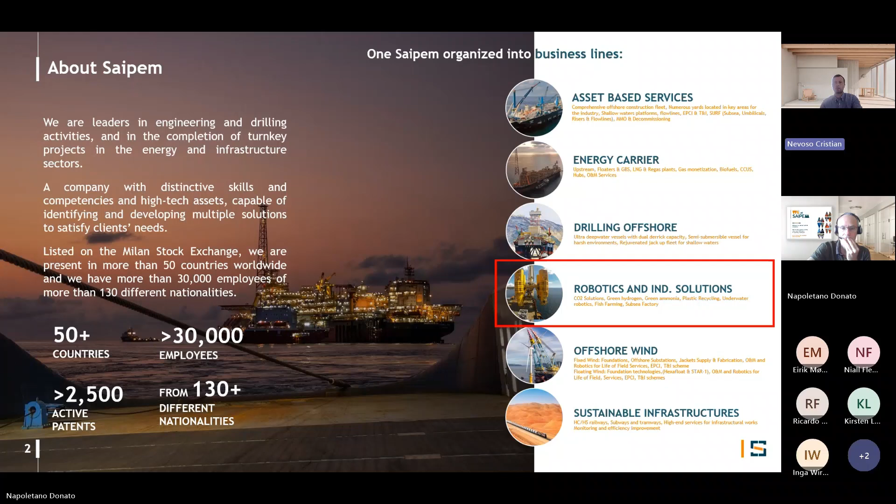Going ahead, let's start with the Hydrone platform overview. Back in 2016, we started working on a new generation of subsea drones for changing our way to approach subsea activities, especially for inspection and intervention campaigns. So we started developing a family of vehicles called Hydrone.

The main characteristic is the fact of not having the need to have a support vessel always on top of the vehicle, but they can remain subsea resident for a few months, being controlled from a remote control station. This was the main novelty that we tried to introduce in these new vehicles, which differs from standard ROV or AUV for this main reason.

Then, meanwhile, we developed the platform. We also introduced a lot of new technologies, artificial intelligence capabilities, a new set of sensors for having more quality data, reliable information, and tried to expand the way we used to perform IMR activities.

All the vehicles are designed for 3,000 meter water depth. They are all full electric vehicles. There is a set of components that are shared between the vehicles - it's a platform, and even functionalities and algorithms that have been developed so far.

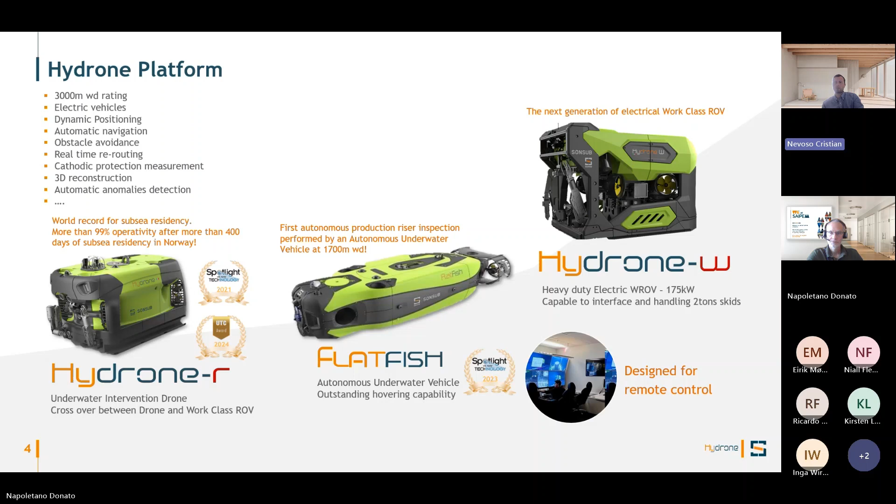There are many things that have been developed on this vehicle. The last one we just completed is the Hydrone W. It's more a Work Class ROV type of vehicle, still a drone that can remain underwater for months like the other vehicles in the family. It was completed a few months ago, and we are just completing the commissioning this month. We will discuss this vehicle more later.

So why did we start working on this new family of subsea drones? Mainly it was for reducing costs, reducing the risk of operation, and reducing CO2 emissions, while improving the way of operating.

The main target of this vehicle was to reduce as much as possible the offshore support while operating. As soon as we deploy the vehicle in a subsea garage, a subsea resident configuration—in the case of Njord it was a subsea docking station—you can, through the remote control station, control it, supervise it, or pilot it. This was one of the main key changes we tried to introduce with this new technology, and the results were very good so far. We are aiming to fully change the way of performing IMR campaigns soon.

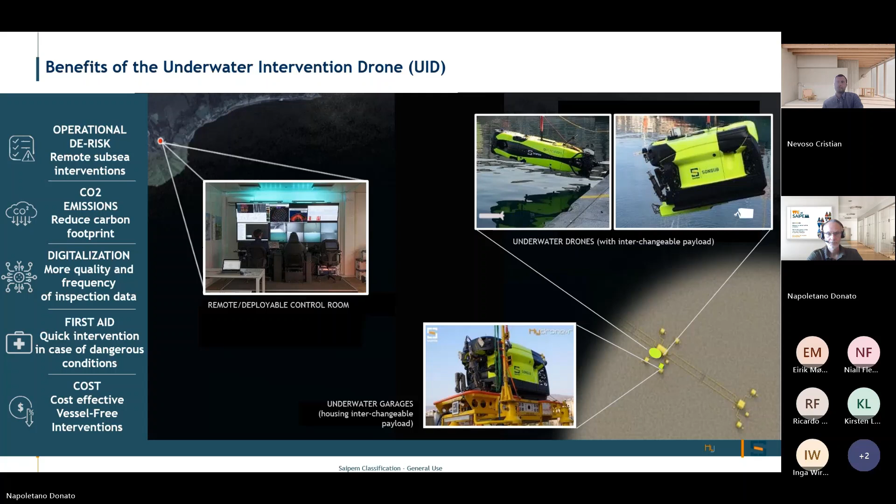Let's go to a more detailed description of the Hydrone-R. As we said, it's a hybrid AUV ROV vehicle, so it has light intervention capability through a manipulator and a grabber. It can work tethered. It has a TMS integrated in the body of the vehicle, which allows managing the tether length while navigating, with the tether connected to the subsea docking station.

The vehicle is battery fitted, so it can travel for a few kilometers, typically for a shift of 12 to 14 hours in terms of autonomy. It can remain subsea resident for a few months. As we said, it was already tested in this configuration, and we will see what we achieved already at Njord.

Currently, the Hydrone-R is remotely controlled from a remote control station. It can even be controlled from a vessel if you decide to use it as a more conventional vehicle. There's this flexibility of using it as launch and recovery from a vessel or in a resident configuration.

It's a flexible platform in the sense that we have a set of payload sensors permanently embedded on board, like stereo cameras for 3D reconstruction, both front and down camera. We have a set of sonars that help the pilot or the vehicle navigate and use the collision avoidance functionality. We also have an imaging sonar and a laser for more detailed structure inspection.

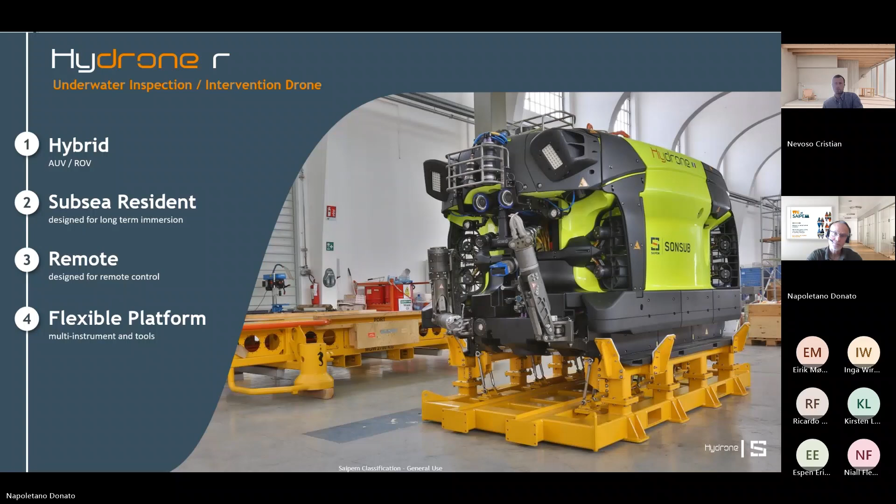Hydrone-W is the second vehicle that is supposed to be deployed in Njord. Currently, we haven't touched on the contractual aspect of the Njord project.

Donato will probably touch on it more in detail later, but we signed a long-term service contract with Equinor in 2019 for 10 years, foreseeing deployment of the Hydrone-R and Hydrone-W in the same field. We started with the Hydrone-R, which was already ready, and the Hydrone-W was developed meanwhile and is now ready for deployment in Njord.

There are some discussions ongoing with the client for understanding the best moment and the best way to use both vehicles there in Njord.

The Hydrone-W is a full electric Work Class ROV style subsea drone that is power fed from an external power source instead of having batteries, since in this case the power required is much higher for the work duties to be performed properly.

It's full electric even in terms of manipulation, so there is no hydraulics on board, apart from specific auxiliary tooling we might want to connect, but it's 100% fully electric.

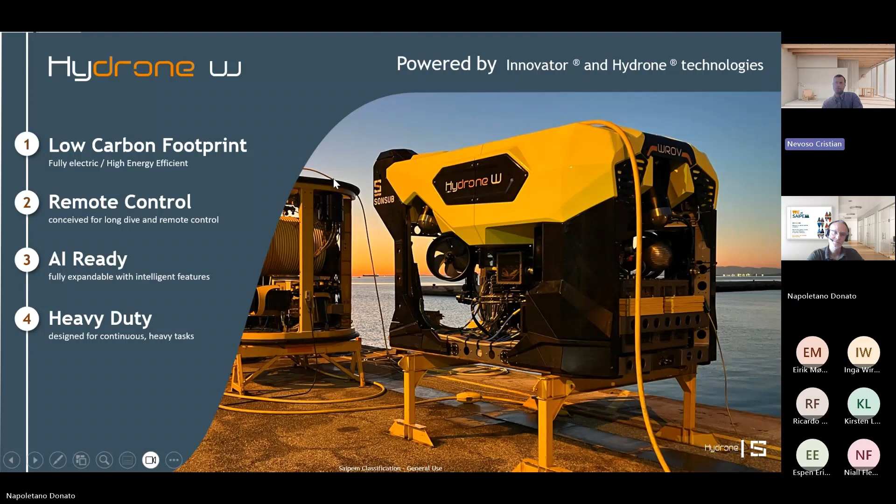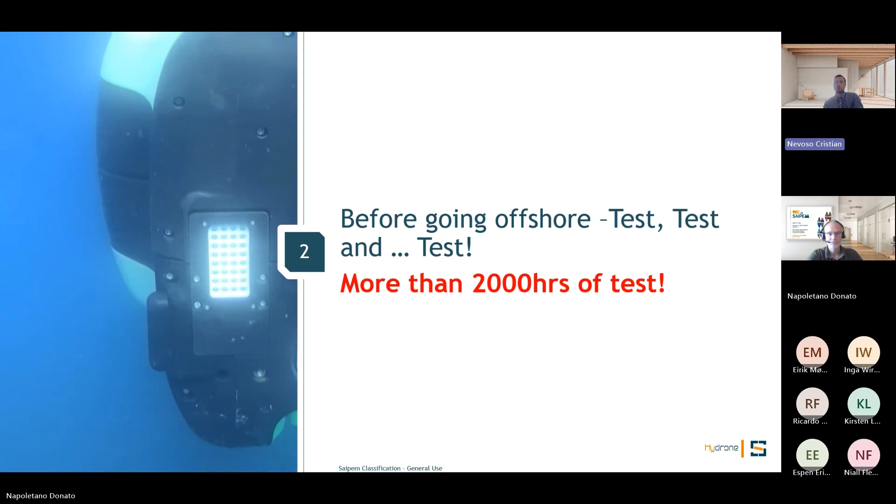Since we discussed this new technology and all the novelty we tried to introduce, one of the main steps was testing and qualification activity. As soon as we introduce new technology in the oil and gas or energy industry, we want something reliable and very well qualified. So we went through a very long qualification process that lasted many months for all the vehicles and was completed in our facility in Trieste.

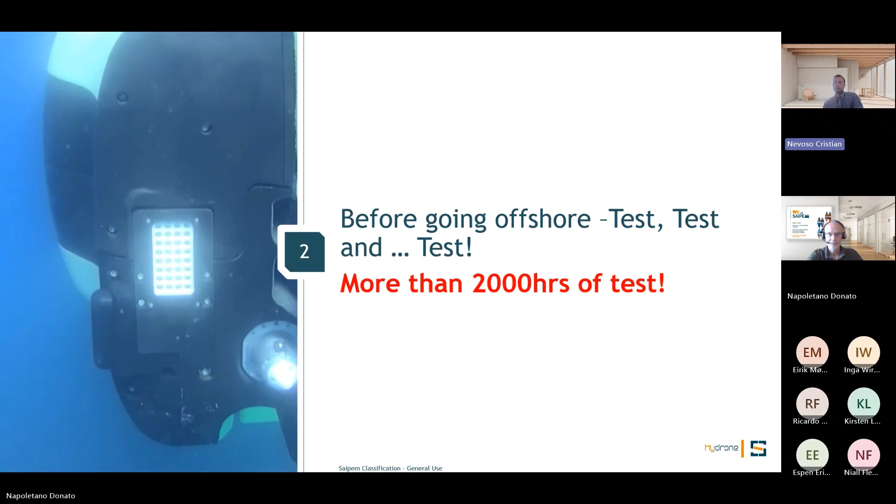This is just a very brief overview of the Trieste playground. Go next, please.

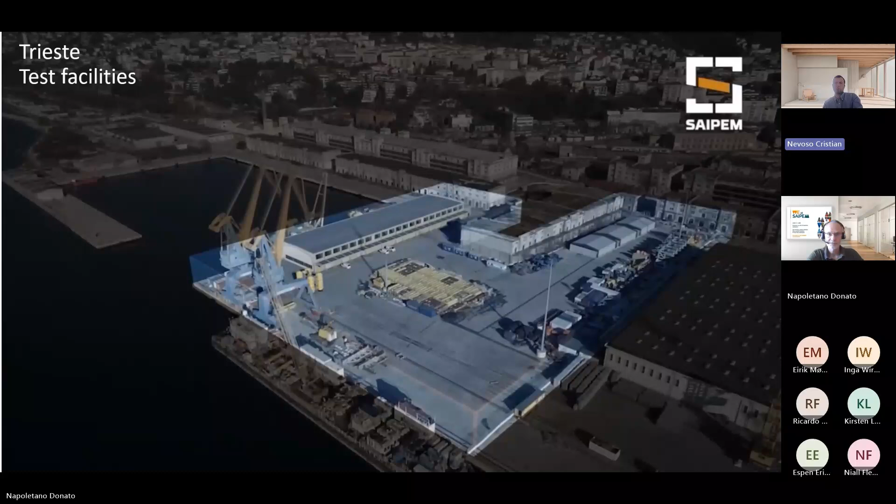It's actually close to Venice, about 1.5 hours by car. Saipem has a yard there for general logistics and operation. In this yard we have a space with access to a jetty and to the water.

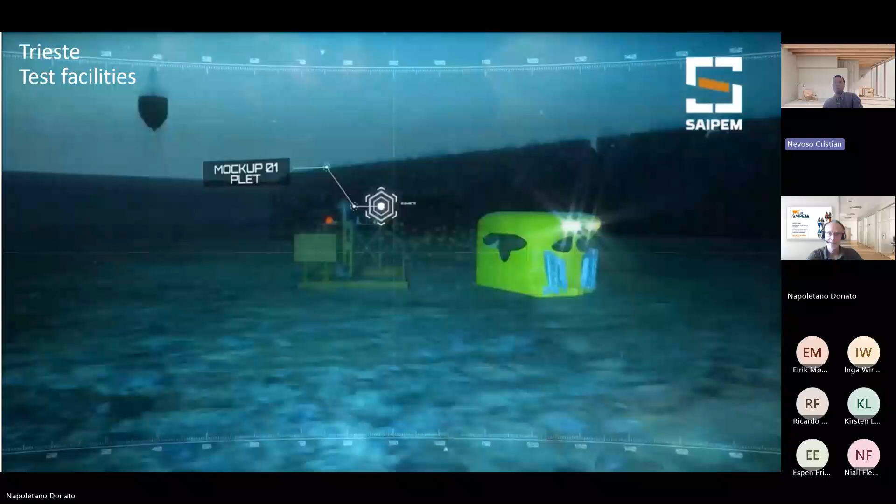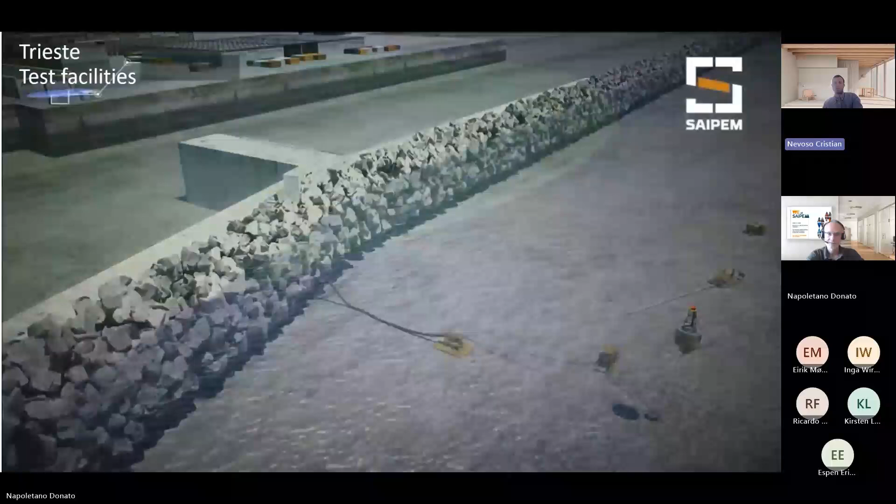This is the area where we used to test subsea solutions in Saipem, where we developed what we call the playground, in which we deployed a few subsea structures to replicate a small subsea field. There are two main areas in the facility.

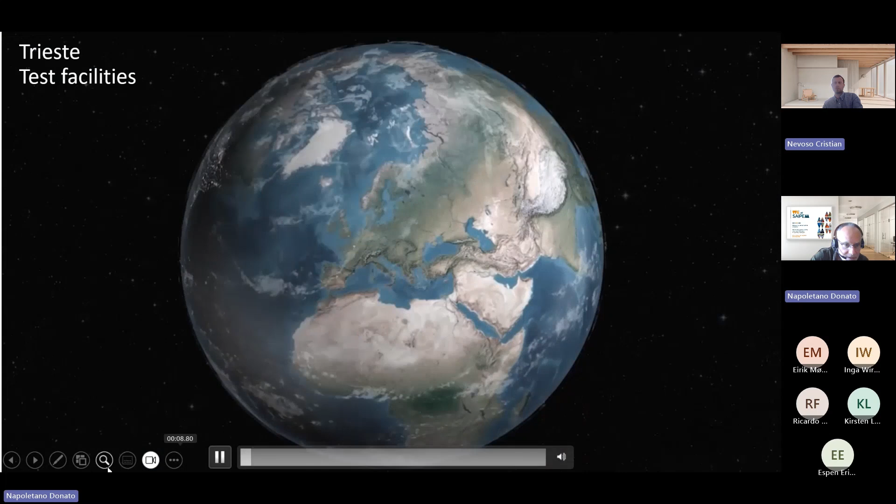As I said, there are two main areas: one more close to the jetty, and the other one in the open sea, I would say.

It's not very far from the coast, about 1 kilometer from the jetty, where we installed a few pipelines, few structures, few cases for trying to train the vehicle, to inspect things properly, and to qualify all the functionality.

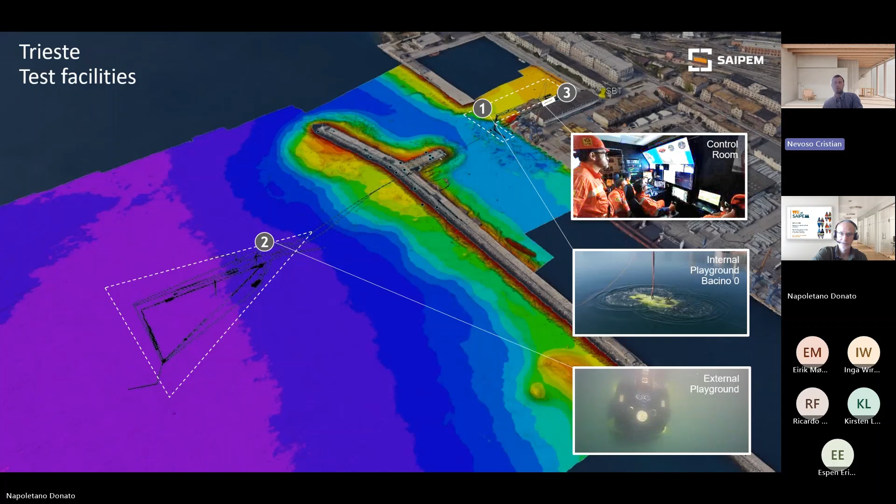If we go next, we can see the detail of what we already installed. Okay, was that the previous one? Oh no, there's no slide for the detail. Okay, probably we didn't include that.

I don't know if there are any questions so far with the general overview of the Hydrone platform and qualification and testing facilities. Otherwise we can just move ahead with the Njord project.

This is Eirik again. You talked about implementing artificial intelligence into this. Is that something you could talk a bit more about?

Yes, sure. Mainly for Hydrone-R and Flatfish, we developed specific functionalities to help them properly navigate, recognize features, recognize anomalies while performing autonomous inspection, or even reduce the risk of collision while navigating in ROV mode.

A layer of artificial intelligence has been developed internally in Saipem. Through the embedded sensors, it is able to improve the way the vehicle can navigate autonomously.

Just looking at the obstacle avoidance feature for example: while the vehicle is navigating in ROV mode and there is an obstacle in front of it, it can stop, understand if there is space on one side or another, replan the path to overcome the obstacle, then restore the original path and continue with the pipeline inspection mission.

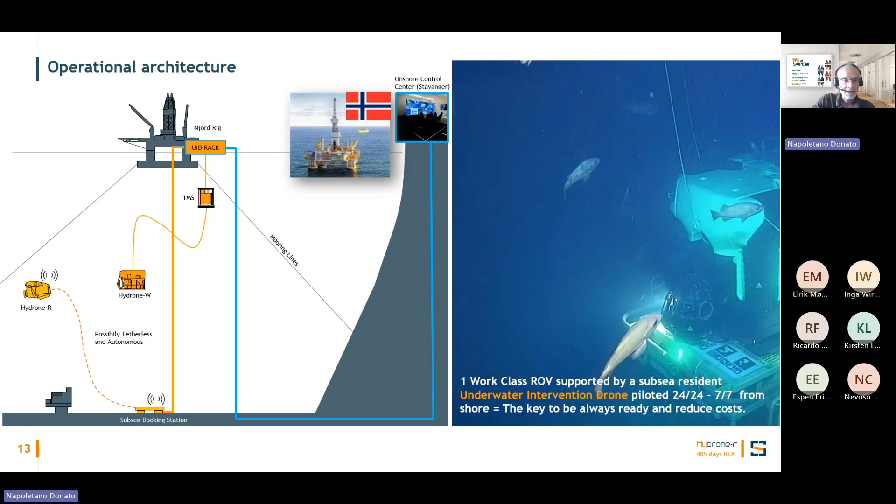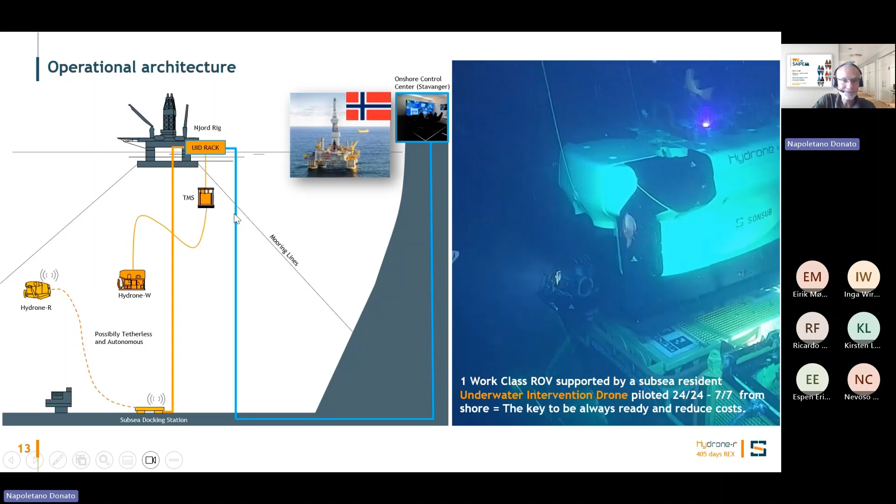This image also shows there is a link from the platform to the onshore control room. We have office and control room in Forus, Stavanger. You're welcome to visit if you pass by. The video on the right side shows one of the dockings of the system onto the Equinor-provided subsea charging station. The docking station is basically to park the vehicle, recharge the batteries, and download the data.

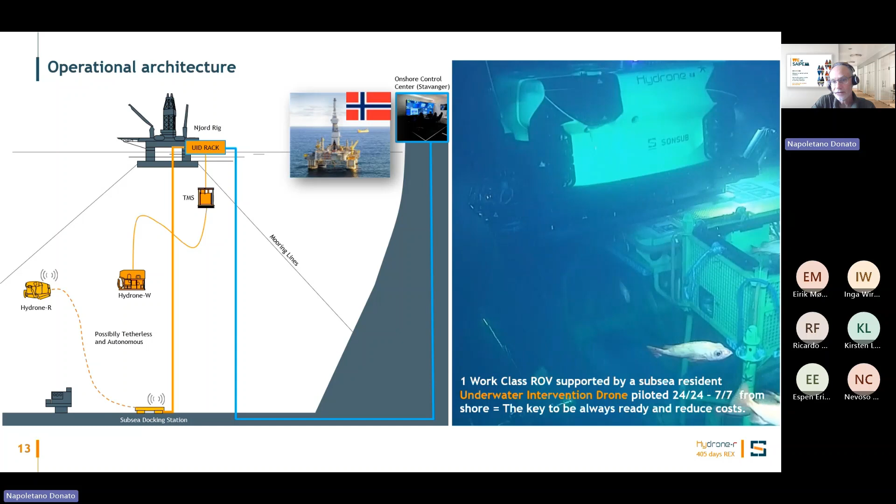Plenty of fishes. That can also be a problem. We have learned operating on Njord that they can have an impact on the optical and acoustic communication, but it's something we are learning to manage.

Okay, then we have inserted this video.

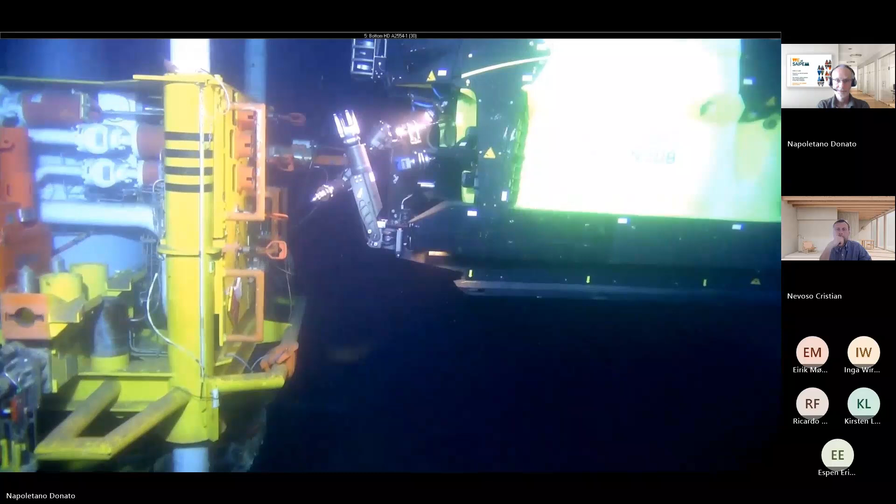This is a short video of a streaming that was organized last year while the vehicle was performing subsea intervention and subsea activities. I think it was good to see the vehicle working in real time while we were performing the activities, and it gave a flavor of what we can achieve there. Exactly one year ago at the UTC in Bergen, there was a live stream.

Next, just some highlights on the project schedule so far. As already anticipated by Christian, the contract was awarded in 2019. Then the rig was delayed by a couple of years because of the pandemic. In 2022, we did the company acceptance test of the Hydrone-R, but at the time it was still in Trieste, not mobilized. We started the operations in parallel with the rig production activities with the work ROV that is presently installed on the platform.

In 2023, we performed the first mobilization and dive of the Hydrone-R, and we completed and started to operate the onshore control room in Forus. 2024 was the second dive. In between the dives, since the system is resident, it cannot be maintained subsea, so it has to come to surface and be shipped onshore for maintenance. So 2024 was dive number 2. In 2025 we are about to start dive number 3 for Hydrone-R, should be tomorrow or the day after, having completed the second planned maintenance.

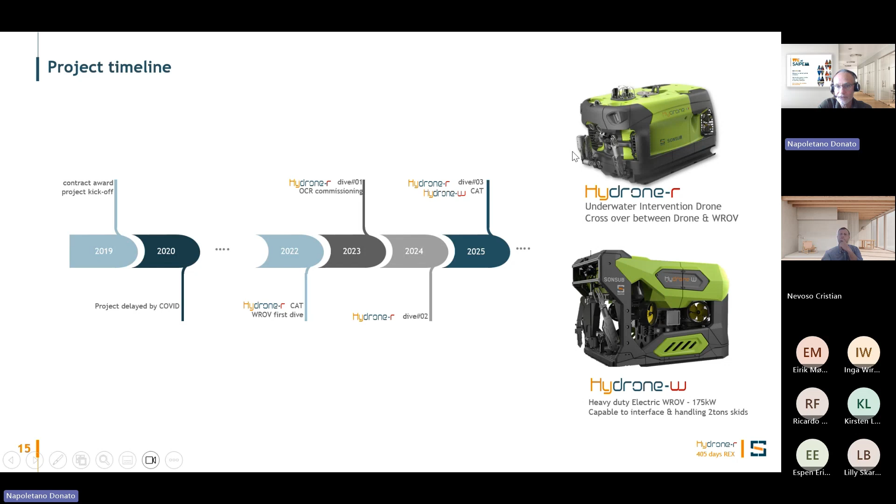This is just a slide to present some highlights on the first dive. It lasted 165 days continuously, which was quite impressive. To me, the most important thing to highlight is that this could be achieved mostly because we performed extensive testing in Italy, in our playground, prior to going offshore. But still, even after so many hours of testing, it was the first time that the vehicle was deployed to depth in the environment where it is operating.

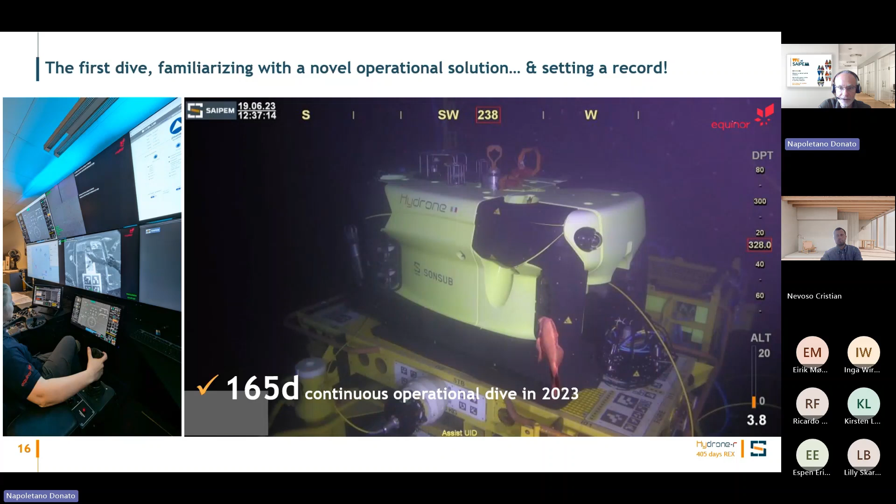So we were very, very pleased about reaching this big number of days. And it was even more on the second dive that was completed last year. We achieved 240 days, almost 8 months continuous operation, with 0 days wasted waiting on weather, of course, because it's a resident system.

We did a period of 11 days in 2024 in which the work ROV was waiting on weather, so it was not possible to deploy it, but the Hydrone-R was able to complete, to carry on with the Njord inspections program, because of course it was already ready in subsea.

We did 30 days more with more or less without ROV support. There was a period in which the platform underwent a revision stop, so there was no ROV personnel on board the platform. There was no ROV deployed, and we had only Hydrone-R supporting the rig operations, piloted from remote, for a period that lasted about a month.

More than 5,700 hours continuous dive, and more than 10,000 hours of offshore time saved with remote operations.

A few tangible achievements: the successful resident deployment for the world's first contract of such type, risk and cost reduction mostly driven by the subsea residency and remote control. We are part of a wider project of electrification of the Njord Field, having delivered electrical vehicles fully remotely operated.

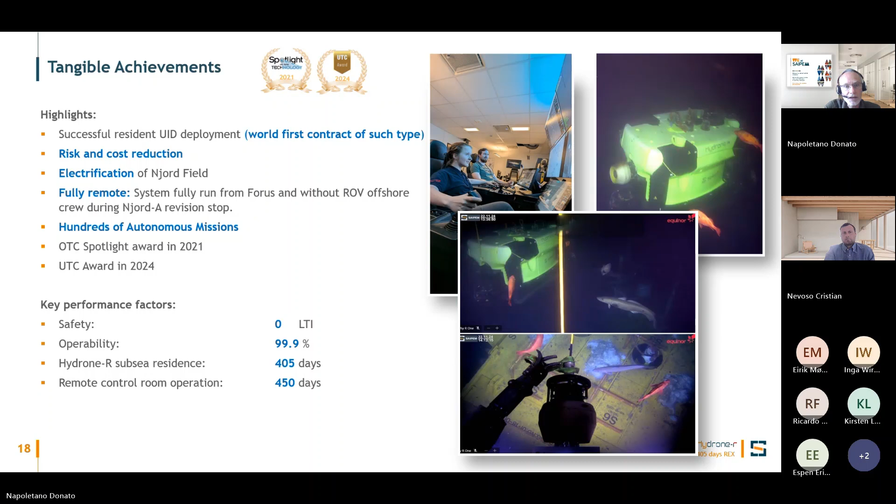To conclude, just a few more details on what we can conclude has been the experience so far. Overall, it's been very, very positive, mainly because of safety results and the reliability of the system. It's also been a good path so far with Equinor, the client, because they've always been cooperating. It's been a real teamwork approach that is always pleasant to do.

We have demonstrated the savings driven by the residency and remote control, exceeding expectations on subsea residency. Myself, I wouldn't have believed that the system would have stayed subsea for 8 months without any trouble. So even the people working in the team, like myself, were really happy about that.

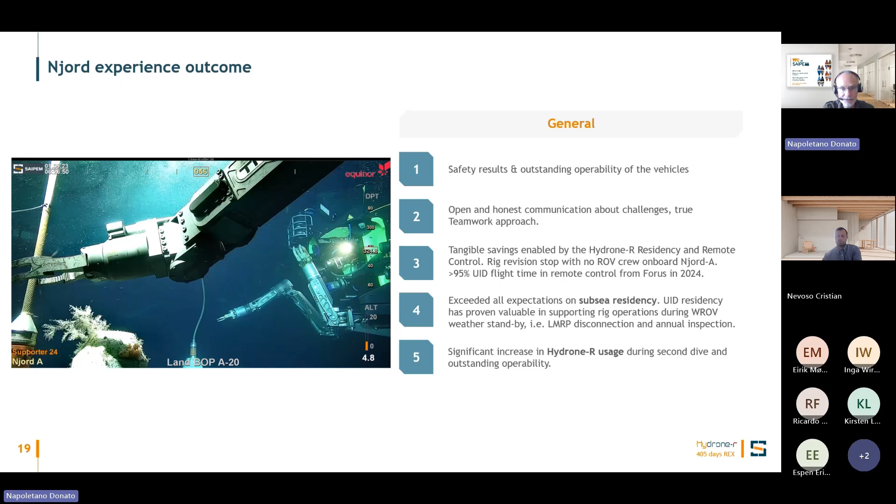Over the second dive, we have pushed the system to the limits. At the beginning, the first dive was again in line with the step-by-step approach, so we didn't push the system too much; it spent some time not directly introduced to the operations. But during the second dive, we basically flew the system every day, and it took part in real operations more than during the previous dive. So it's gaining even more confidence as we go, from the people and from the client. We have also learned a lot in the field, because of course we are in different environments from the testing facilities.

For example, we have implemented acoustic communication environmental adaptations that was not possible to do in Trieste because we had shallow water. So we have learned how to communicate with the vehicle on the field. We have performed like 400 hours of AUV missions, still connected with the tether, but fully in autonomous mode.

We did also demonstrate on a few occasions full tetherless AUV inspections. We did some Christmas tree inspection in autonomous mode and a survey grid.

We did learn a lot on the recovery of the vehicle when it was sent to the maintenance. As you can see from the picture, in some components like the manipulator, the amount of corrosion and marine growth has been excessive. But this has been a good learning, because the system generally has been designed by us to be subsea resident. But there are third-party commercial items like the manipulators that are not sold to be resident. So there has been a lot of work, particularly during the last maintenance, to improve the third-party equipment subsea residency performance. We expect this will be an improvement over the future dives.

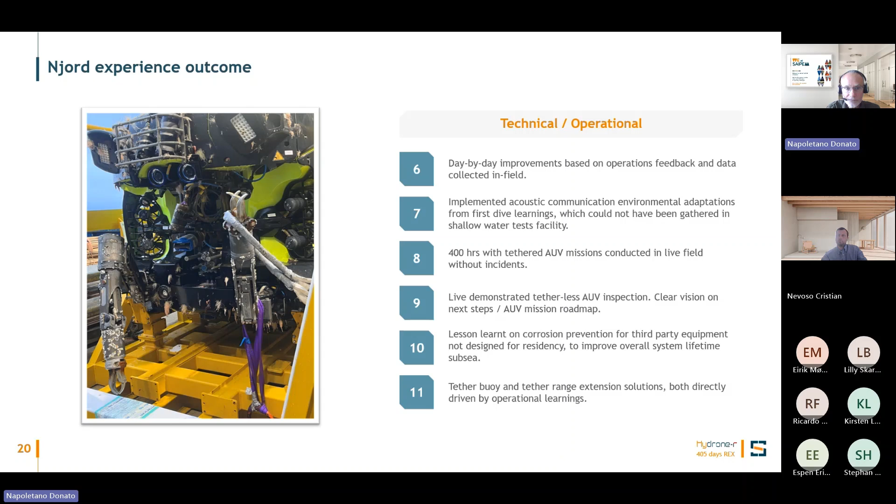We have also learned by doing what we can do with the system. For example, I can show better in the next slide, something that we thought during the operation was to connect basically the Hydrone-R to the Work ROV, rather than connect the tether of the Hydrone-R to the SDS, that is the subsea docking station. This way, basically, we almost doubled up the length of tethered coverage.

So this way, we can further reduce the need of a vessel to perform some of these inspections, because we can actually go with the system in tandem configuration up to 500 meters from the platform, and this should bring significant savings for Equinor. This is something that has been tested already, not to 500 meters, but during this upcoming third dive it will hopefully be proven. This is something that we are working on.

Okay, so as I said, we are about to start the third dive. Focus will be very much on keep learning and keep developing autonomous missions. We will start once again with field adaptation and familiarization, because, for example, the issue of the fishes interacting with the communication of the vehicle still needs to be fine-tuned.

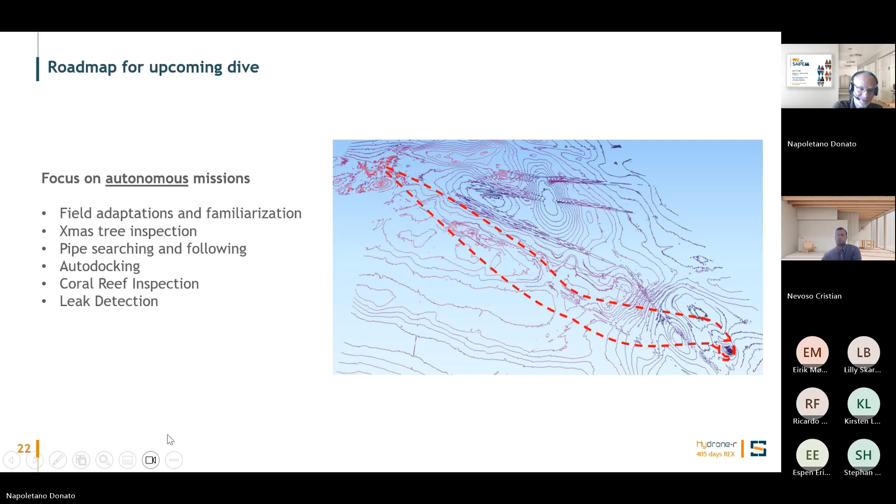I have one question about the distance. How far can it go away from the docking station? Is it like time or distance? If you're doing the pipeline inspection, I guess that's a limitation of how far. From Njord A to Njord Bravo, it's less than 2 kilometers, but I think the acoustic communication, in theory, can work up to 3 kilometers in those conditions.

We need, of course, to demonstrate that we can go that far. Cristian, correct me if I'm wrong, but I think we can even go further than 3 kilometers, though then we will not have any communication, right? Yes, indeed, acoustic communication would be the limit.

I think the question is more related to how much autonomy the vehicle can have without needing to recharge the batteries. The vehicle can travel about 10 to 12 kilometers maximum. Obviously, in this phase, we are trying to always have an eye on what the vehicle is doing through acoustic communication.

What Donato was mentioning is the fact that having an acoustic beacon talking with the vehicle, at least to monitor its position and what it's doing, not piloting, because through acoustic that's not possible. The communication is not fast enough for piloting, but at least to monitor what it's doing is something we are trying to keep. But generally speaking, with the increasing maturation of the technology, we expect to even launch missions in which we don't know what the vehicle is doing for a few hours, waiting for it to come back to download the data and post-process the inspection data.